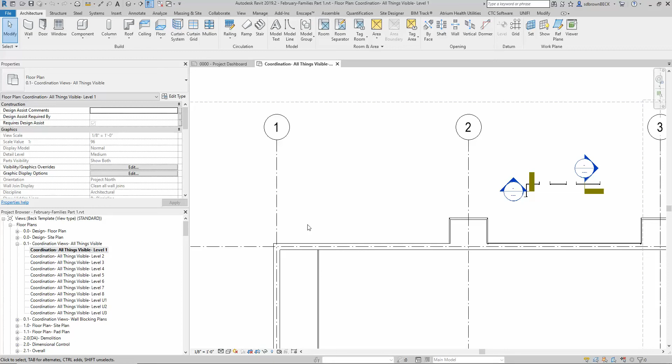We had a project that wanted some specialized wall panels with profiles, and we decided to use the curtain wall tool to achieve this. The manufacturer has some panel families that seemed to work, but we had to make some changes to them. Anyway, we have a good solution, so I want to show you how this works.

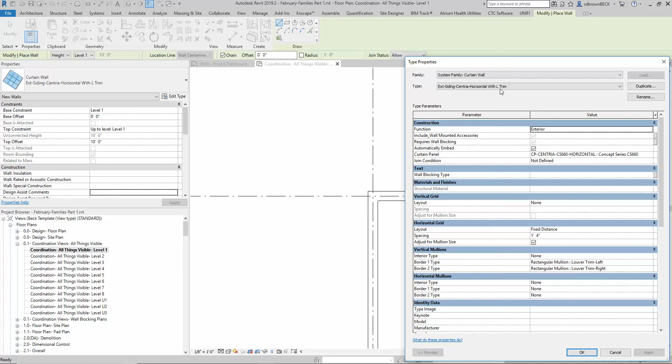Using the wall tool, it's a curtain wall called Centria, horizontal with L trim. This is set up to utilize this horizontal curtain panel with a horizontal fixed distance of 1'4", which is the spacing that the panel comes in. So if the wall is a multiple other than 1'4", we have to swap the top panel out with one that cuts. I'll show you that now.

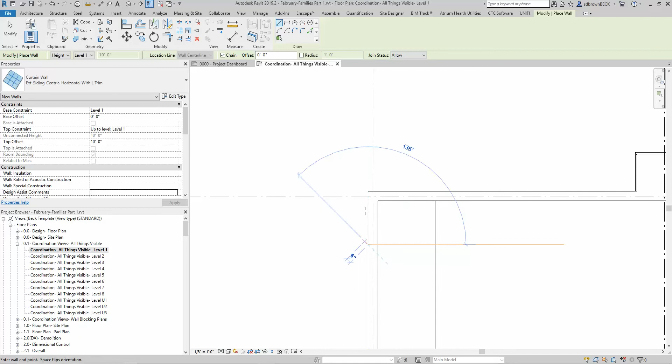A straight segment is very easy. Just draw it, and there it is. I've set the origin, or the wall - since it's an exterior finish, the inside is the surface you draw on, so whatever your backup wall is, you draw over that, and that will make your panel.

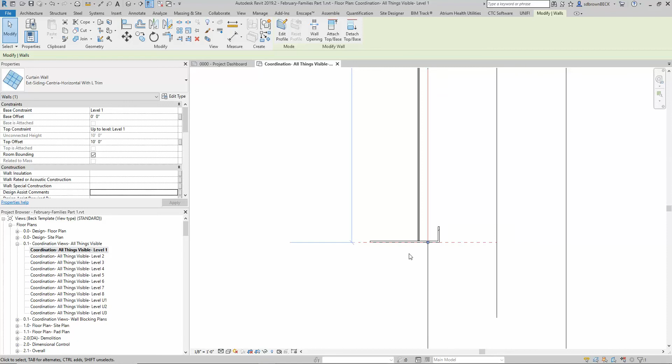The L trim can be adjusted by the profile itself, so if we look at this mullion, it's set to be the left, and that's its profile, and then the right is the same name, but right now I haven't assigned a material to it or an assembly code. I want you to do that once you've decided what these materials actually are.

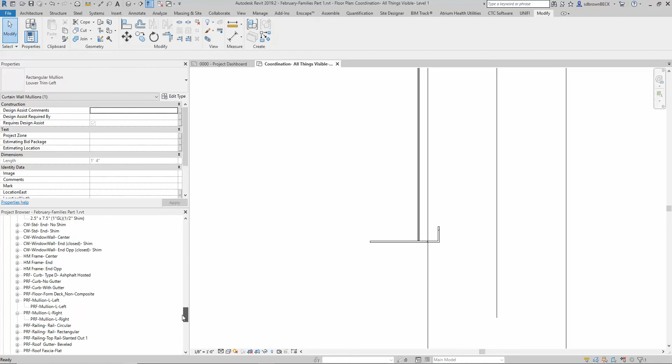The thickness is also something that can be adjusted in the profile, which is down here. So if you just double click that, you can see its depth, 6 inches, its projection - that's from the origin - and then its thickness. So if it's thicker than 1/8, just change it there, and its width if it's thicker than that.

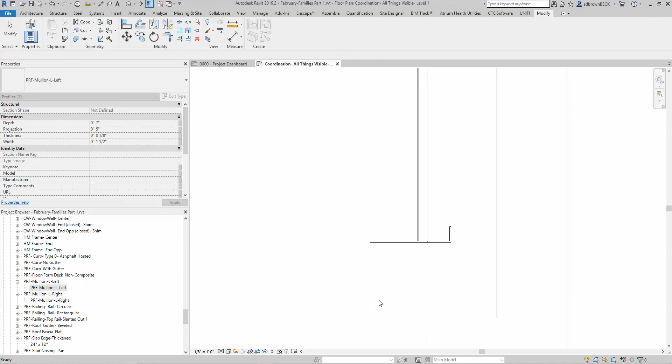You do that for both the left and right. I'll just change that so you can see that gets deeper. You would also want to adjust the projection to move that out, if indeed that wasn't sitting where we wanted it.

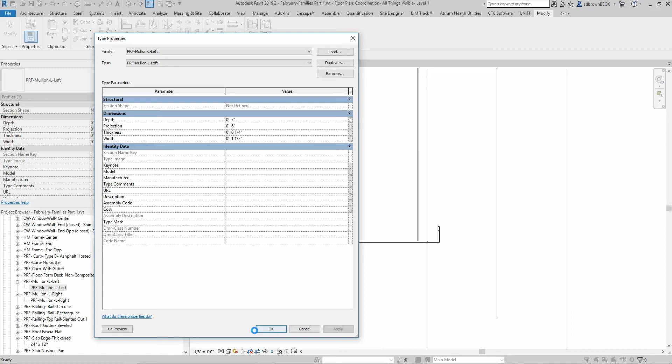I just guessed originally where that location was, so these two parameters are what you're going to use to control that. And then if the thickness was different, we'll make it 1/4 inch just to give it a little beef. Now it's thicker, and you'll notice the other one's not thicker yet, so let's go ahead and change that one too.

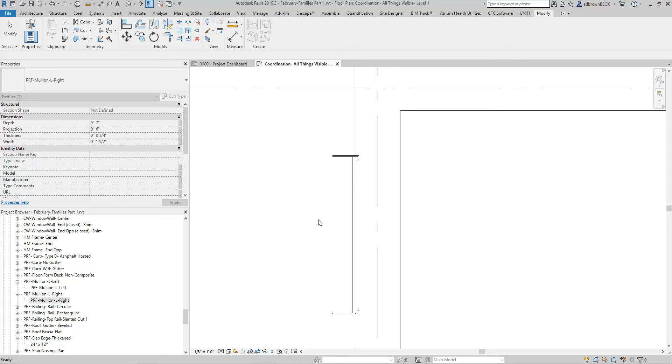So let's cut a section through this. You can see that it's producing a nice looking wall panel. Goes all the way up. The mullion is that L trim, and then this is what I'm talking about, the top.

If your wall type is exactly a multiple of 1'4", so let's say you had - 1'4" is 16 inches, so 16 inches times 10 - I guess that doesn't work. Anyway, if this was a multiple of 16 inches, then this would work.

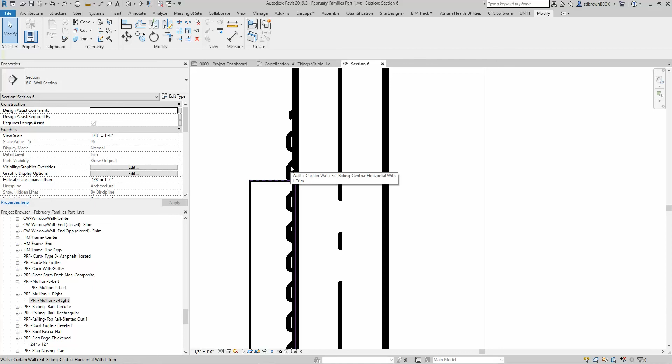So if I were to stretch that up to there, it's always going to put another panel up there, it looks like. So what we have to do, since yours is only 10 feet tall, is take this top panel, unpin it, and change it to the one that's called cut panel. And then that cuts right at the top. So that should work with any different height.

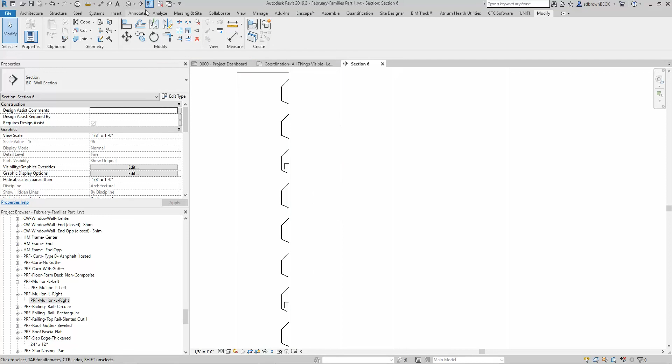You can see that that will stretch. Now we could just make the whole thing with the cut panel, but then you wouldn't get that little hook in your detail views that you might want to have there. That will get cut off if we just set the system to use the panel that's cut. Anyway, so that's the straight one, and that's relatively easy.

So now let's talk about the corner. Let's move that down here. We're going to right click, create similar, and we'll go from here to here, and then over to here.

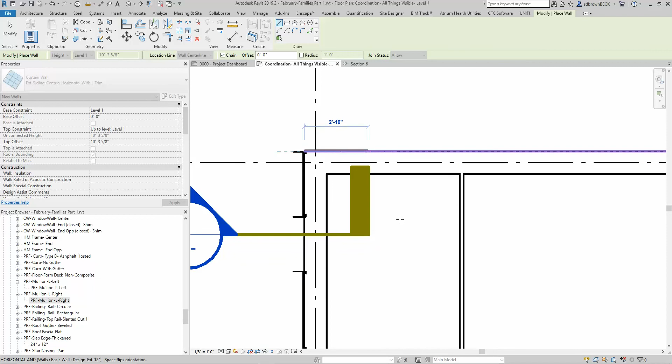Okay, and I told you the other day that we just need to unpin these and delete them. And then now on one of these, we need to set it to be an empty panel. So I'm going to take this one and select panels on host. We're going to unpin those, and these are going to be empty because we need to use the corner panel.

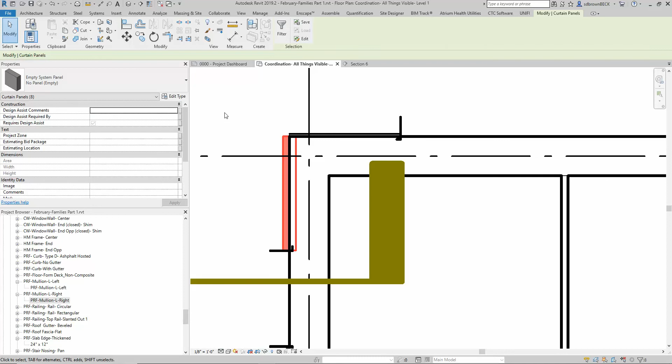And so that makes that disappear. And then I'm going to right click and select panels on this host and unpin them. And these are going to be the corner panel - and that puts the nice corner panel on.

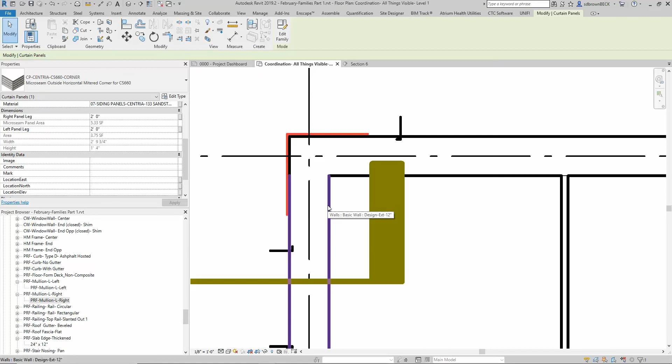Now the corner panels have a parameter, an instance parameter for the length of the right and left. So each panel could be a different length. We could make that type-based if they're all the same, but right now we made it flexible. So what you need to know - that distance is going to be from the wall to there, minus the thickness of the L trim.

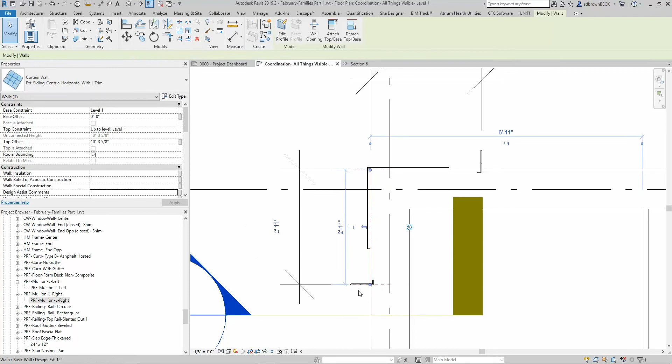Let's go ahead - these are probably the same. If they're not, that's fine. The legs can be different. Let's do them different just so you can see.

So we're now going to select these panels. Again, we want them all because they're stacked on top of each other. So we want all the panels on this host. And we want to make the right leg, which is this top one, 2'9 3/4". And the bottom one, 2'11 3/4".

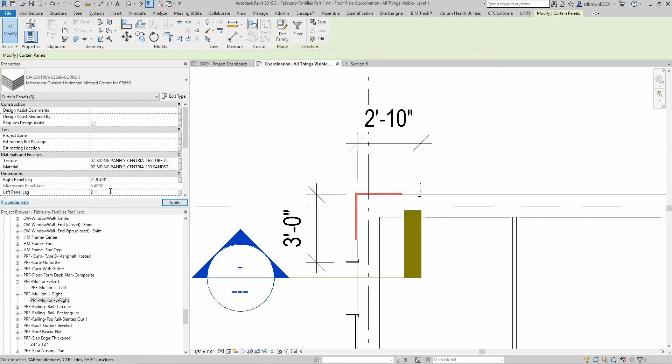And there you go. Now you have your panel, and that all looks pretty cool in 3D. I'll undo this - so that's it. Hopefully that will help you achieve your goals.

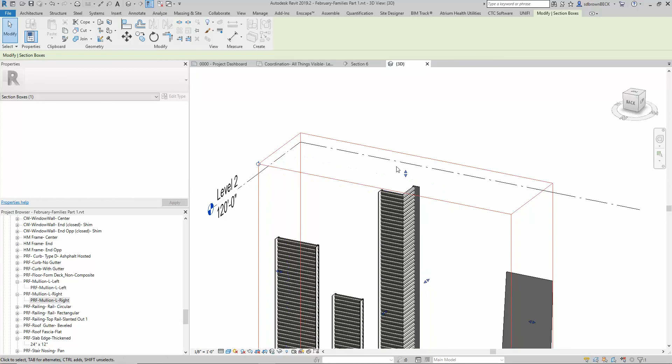Oh, and the corner one has the same thing if you need to make that real tall. I think I'd already replaced this on the top with the cut top - the corner has a cut one too. If you don't have that, it might have a little extra on it. So hope that helps.